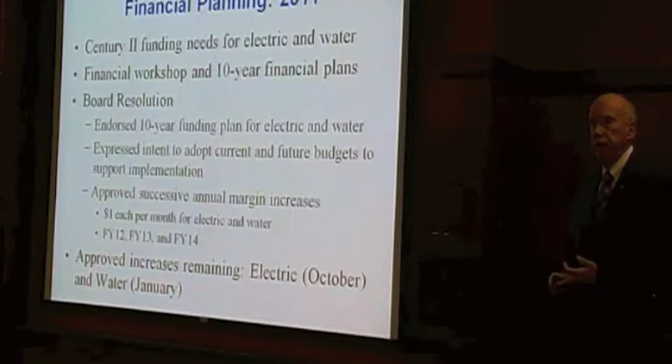And ultimately, the board approved a resolution that did 3 things. Number one, it endorsed the 10-year plan, a 10-year program for our Century 2. Not that it'll be finished in 10 years, but we had presented a 10-year plan, and you basically endorsed that plan. That resolution also committed to continue to fund budgets that included the necessary capital plans to address the Century 2 needs.

And lastly, the board did something that had not been done before. You approved a series of 3 consecutive yearly increases for both electric and water. Those increases were to occur in fiscal year 12, 13, and 14. It would be $1 a month for each residential customer in water, and for each residential customer in electric. All but the last of those rate increases have now occurred.

The last electric rate increase will occur next month in October. The last approved water increase will occur in January.

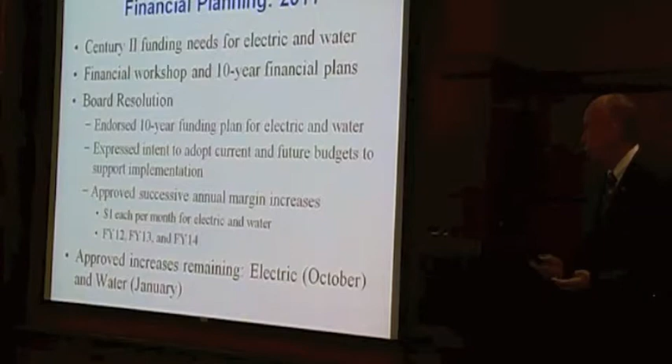So what that means is we're now at the point where we need to start talking with you in more detail about what comes next. The other thing we heard more recently from you all, probably at the end of last year's 5-year plan, is that you've been very complimentary and supportive of us in our 5-year plan presentations, but that's an awful lot of information crammed into a pretty short period of time. It's an extended meeting, but there's a lot of detail, complexity, and a lot of things we're asking you all to absorb and react to.

So as Ms. Roach indicated, what we're doing this year is coming back to you starting today. As soon as I'm finished here, Julie Childers, our Vice President of Engineering, and Mark Rawhuff, our Manager of Water Systems Engineering, will be presenting to you detailed information on our wastewater system. Next month, we'll come back and do the same thing on gas, and we'll also have a gas and wastewater financial workshop.

And then in the months to come, we'll do the same kind of thing, presenting to you our water system and our electric system. And ultimately in the spring, with the 5-year plan, we'll come back to you with more information and asking for multi-year rate increases for all 4 divisions. So that's where we're headed.

Wanted to give you all a little bit of information so you'll better understand what to expect over the next several months, and hopefully this will help give you the opportunity to absorb it a little bit better, think about it a little bit longer, and engage with us with questions, suggestions, and ideas, so that when we come into the spring with our 5-year plan, and ultimately with the resolution on funding, everybody will feel very comfortable about where we are and where we're headed with this program.

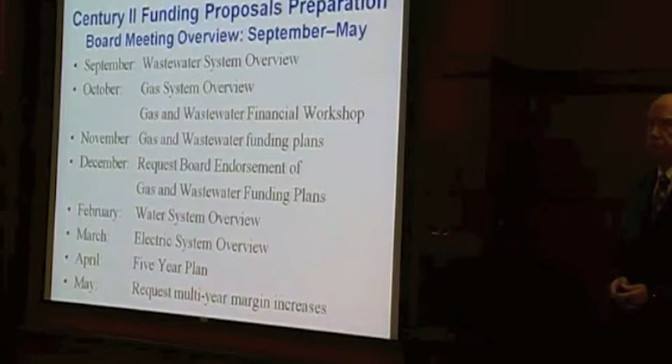This is the agenda of what I'd like to talk about today, beginning with the EPA consent decree back in 2005, and then continuing on with our response to the consent decree, which started with communication with our customers, and then our rate increases and budget expenditures at that time to fund the projects, and then the delivery of the required projects.

Next, Mark Rawhuff will be doing the look back 10 years, in 2003, to where we are today, and then a 10-year look forward, and then Mark Rawhuff will show some examples of TV inspection and sewer rehab that we do in our system. We'll follow that up with how we're going to be transitioning from our PACE 10 program into Century 2 for wastewater.

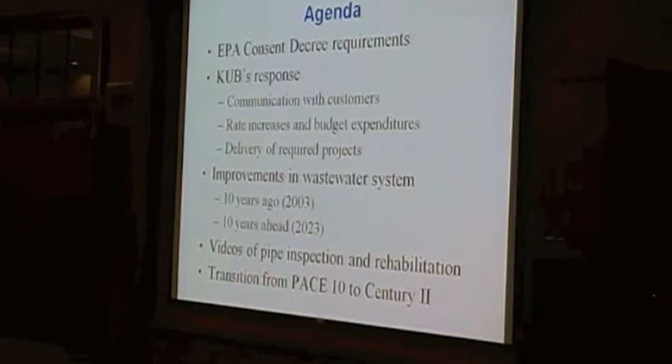Back 10 years ago, in 2003, it was a difficult time for the wastewater system. There were a lot of regulatory items that happened in 2003, beginning with a TDEC order at the beginning of the year. Then in the fall, the Tennessee Clean Water Network and the city of Knoxville felt that TDEC order was not stringent enough, and they filed a lawsuit. Later that year, EPA offered negotiations, and that occurred over the next year, culminating with the signing of the EPA consent decree in February of 2005.

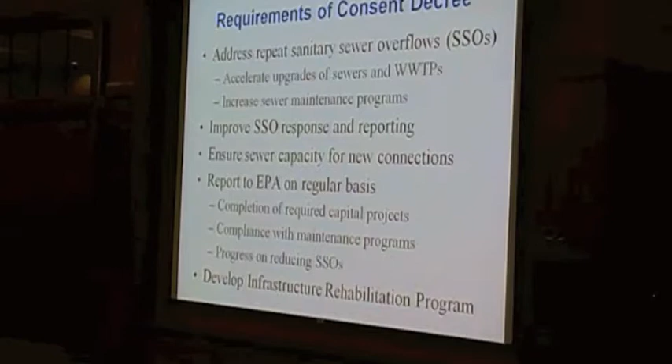So what were the requirements of the consent decree? There are many things required, but I'm listing the major ones here. First of all, we had to address the repeat sanitary sewer overflows, or SSOs - those that occurred twice or more during a 12-month period. In order to do that, we had to accelerate the upgrades of both our collection system sewers as well as our wastewater treatment plants.

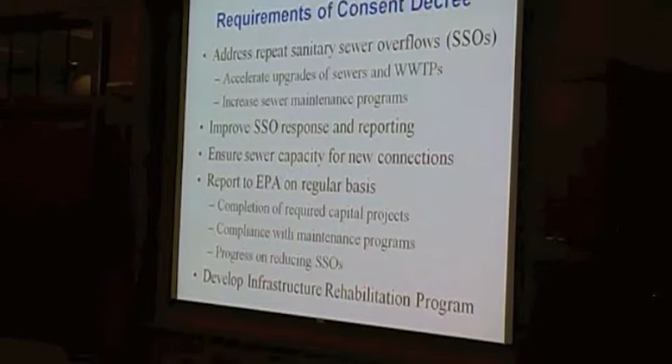We also had to increase the frequency and type of sewer maintenance that was done. Another CD requirement was to improve how we responded to SSOs, both in cleanup and in reporting those back to the regulators. A third component was the capacity assurance program - at this time there was a lot of growth in the system, and they wanted to make sure new developments that came on would not make the situation with SSOs any worse. A fourth component is our requirement to report to EPA regularly when we finish capital projects, how we're doing with our maintenance programs, and our progress on reducing SSOs.

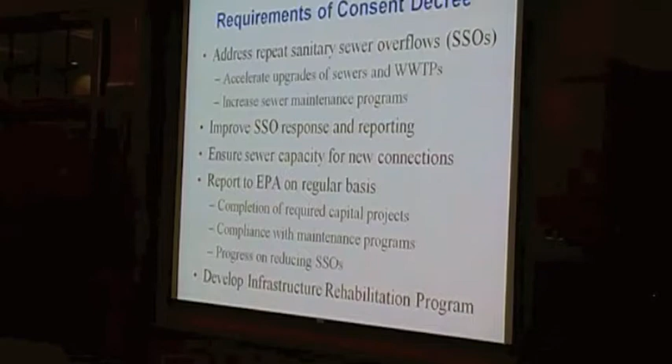A final component I'll list here is the development of an IRP, or Infrastructure Rehabilitation Program. I'll talk more about this later in the presentation, but for now, consider an IRP to be equivalent to our Century 2 program for wastewater.

When we had a delayed increase in our expenditures, that required a very steep increase all at once. And of course, that situation is not necessarily desirable either.

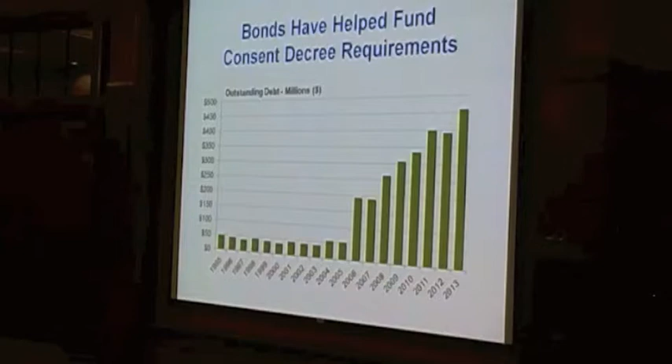We also funded these increased expenditures through bonds, and you can see that in 2006 is when we really started with increased debt in order to be able to fund our phased-in expenditures.

And we did complete those all before the deadline of June of this year. The second phase, which is due in June of 2016, there are 8 projects, and we've completed 6 and have 2 more under construction right now. Those 2 should be complete by spring of 2014.

In addition to the collection system projects, we also had major upgrades required in our treatment plants. This map shows the major drainage basins and where the sewer lines are located within them. If you look at the Kuwahee Basin and the treatment plant here, that's all shown in green. You can see it's our largest land area for a drainage basin, and it also has the highest density of sewer. On Fourth Creek, that's our second largest plant, and that's the one you all saw on your tour last month.

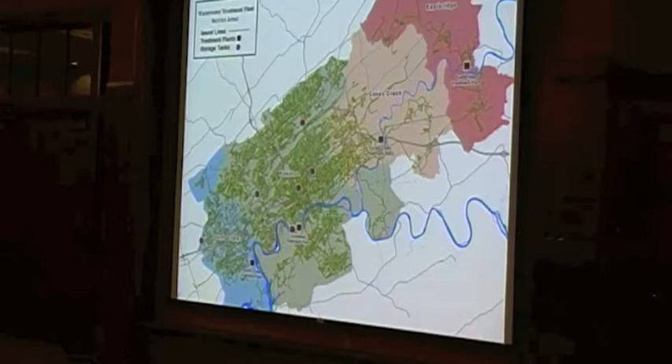I want to go in a little bit more detail about our wastewater treatment plant upgrades. We had 4 major projects that had to be done on these 2 plants. Phase 1 at Kuwahee was completed last December at a cost of over $50 million.

The Fourth Creek Phase 1 is the one that you all saw under construction. That's due in December of this year, and it looks like we're going to finish that maybe a couple of months early. Then there'll be a Phase 2 at Fourth Creek that's due in 2018, which is a much smaller upgrade, and then a larger upgrade at Kuwahee in Phase 2 that's due in June of 2021.

So with all the work that's been done on the collection system and all the work that's been done on the wastewater treatment plants, it's a good time to look and see what actually remains left to be done on the consent decree. As I mentioned, we have finishing up the last bit of the Fourth Creek wastewater treatment plant by December of this year.

Then we have another big deadline in December of 2016. By that time, we have to finish those 2 Phase 2 projects, and we also have some maintenance deadlines as well: sewer assessment completed, our private lateral assessment, manhole assessment, and stream water quality monitoring. And you can see that we're well underway on all of those.

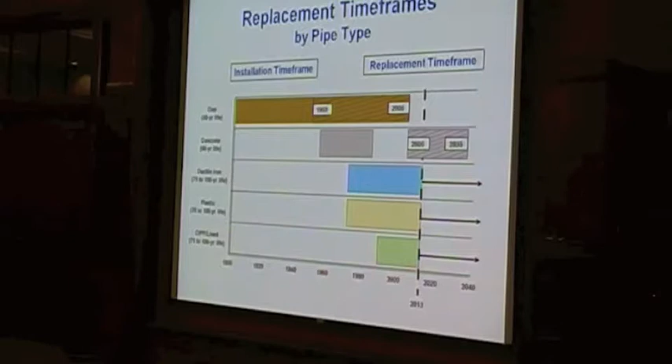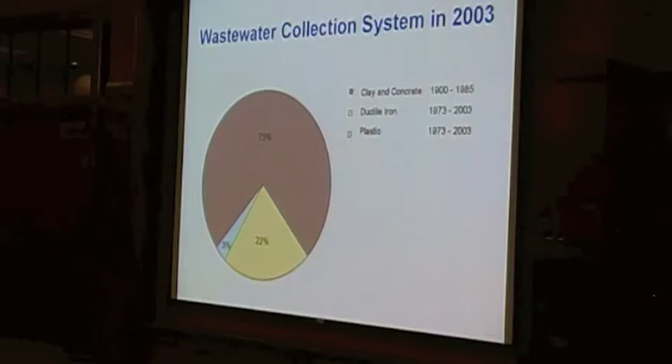So we're going to look at these next 3 slides. We're going to look at a snapshot in time of what our sewer system looked like 10 years ago, where we are today, and then where we'll be 10 years from now if we continue on the same pace that we're at right now. So 10 years ago, before the consent decree, our system consisted of 75% of the older type of pipe, the clay and the concrete. We had a small amount of ductile iron and plastic as well, 25% virtually of those two.

Where we are right now, 10 years later, after having 9 years worth of pace and work being done, the situation has changed to, instead of 75% old pipe, now we're down to about a half and half situation between old pipe and new pipe. So we've improved the situation quite a bit.

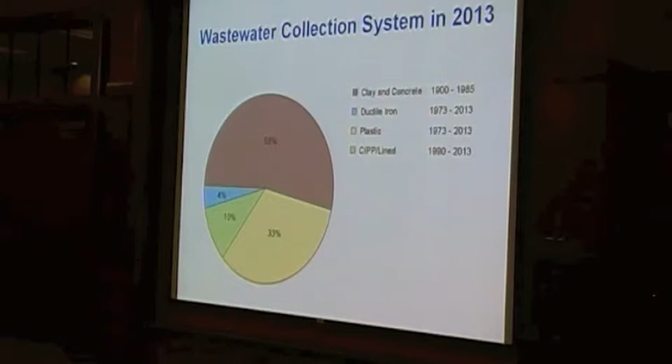Now the next thing we want to look at is if we continue on at the rate we've been doing, which is 2% of our system per year, or 25 miles per year. That's the rate we've been improving our system since the beginning of the program. If we continue on at that rate, then in 10 years from now, we will still have 1/3 of our system that has the old type of pipe in it, the clay and concrete.

What percentage of that 33 is clay? It'd probably be all gone in 10 years. That's what we're concentrating on, since that's the oldest pipe. At that point, it'd be almost virtually all concrete pipe.

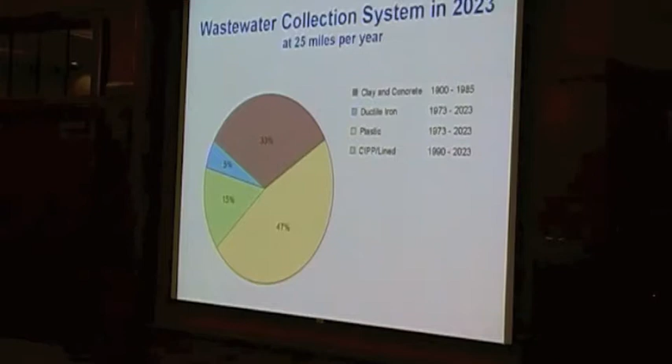So this slide shows a summary of what we just looked at in the previous pie chart. Beginning with 2003, where we had 75% old pipe. Now where we are now, about half and half. And then in 10 years from now, at the same rate we're going, we'd be down to 1/3 old and 2/3 new. So that's quite an improvement, but it kind of raises the question, when do we get rid of all the old pipe?

And so that's shown on the next slide here. It actually takes us all the way to the year 2040 at the rate we're going in order to get rid of all that old pipe.

Now when we get to 2040, does it mean we're finished then? Well, not really, because at that point we start the cycle all over again with that plastic pipe and still continuing to invest in the system.

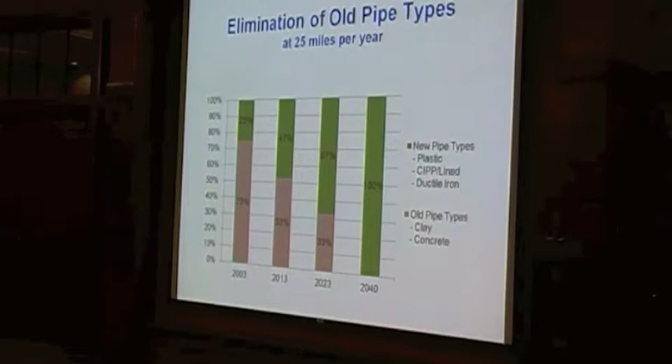So the important thing to realize here is that, first of all the old pipe will be done by 2040, and if you remember the previous slide where we showed the model replacement program being done by 2035 would be desirable. That's close enough for sewer years. That's a good match. So that's what we're recommending based upon this analysis.

I'm going to talk a little bit more about the IRP. The IRP is really EPA's assurance that a utility will continue to invest in the system in such a manner that the system doesn't deteriorate, and so that we improve on our SSO numbers.

So, based upon the previous analysis, the IRP for KUB would be to continue at the rate we're going at 2% of the system per year, which equates to 25 miles per year. This removes all of our old pipe types by the year 2040, and this is a similar analysis to what we did in Century 2 for wastewater.

So why do we need to do it? First of all, it meets the requirements of the consent decree to have a sustainable life cycle replacement program. It also continues to reduce the infiltration getting into our system by eliminating the old types of pipe and upgrading to pipes that are more watertight. And of course, that demonstrates KUB's continued commitment to reducing SSOs without outside enforcement from EPA.

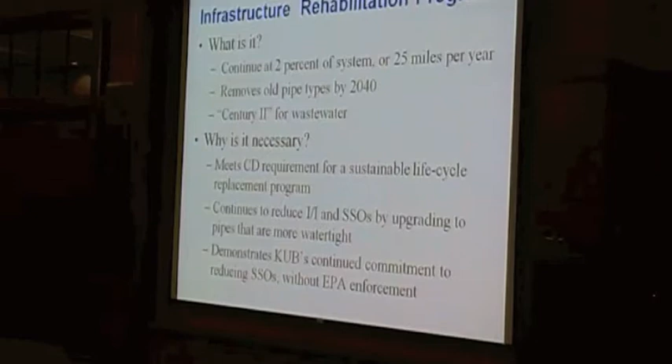Is there a certain area of the county that would have more of that clay pipe than others? A lot of the center city area has more clay pipe. Williams Creek was one that had a lot of clay pipe. We've done a lot of work in Williams Creek and got rid of a lot of clay pipe there already.

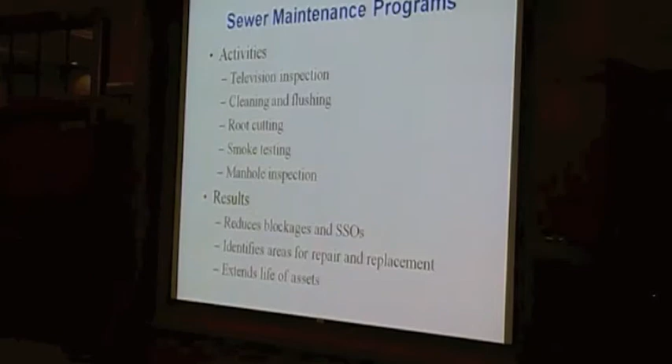In addition to the capital programs, we also don't want to forget the maintenance programs. As I showed a minute ago, maintenance is part of the EPA consent decree, so we want to make sure those activities are carried forward into the future. Those activities include TV inspection, cleaning and flushing, root cutting, smoke testing, manhole inspection, and others. The benefits of continuing with these programs are that it reduces blockages and SSOs, identifies areas for future repair and replacement, and extends the life of the assets going forward.

Next, Mark Rauhoff is going to show some examples of TV inspection and also sewer rehab techniques that we use in our system.

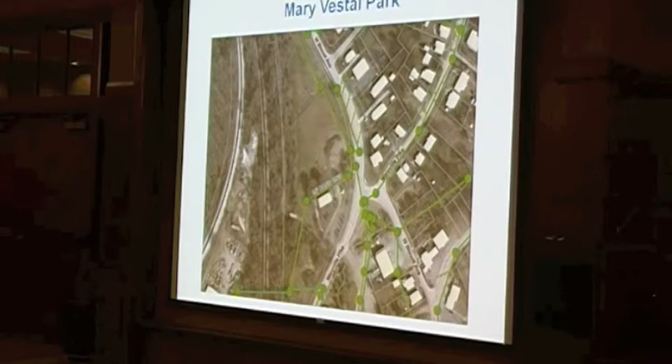This map shows an area in South Knoxville near Mary Vestal Park. We have a 24-inch concrete sewer trunk line inside the park. It was installed in 1960, so it's over 50 years old, which is beyond its expected life of 50 years. We're planning on replacing this section of pipe, 225 feet, in the next 3 months. So this project is ready to be constructed.

And you'll see in the video why this line needs to be replaced. The video will show you the inside of this 24-inch concrete pipe. You'll get to follow the camera down the pipe and see what we see when we look at these videos each day. It will show the camera going into the manhole and then into the pipe.

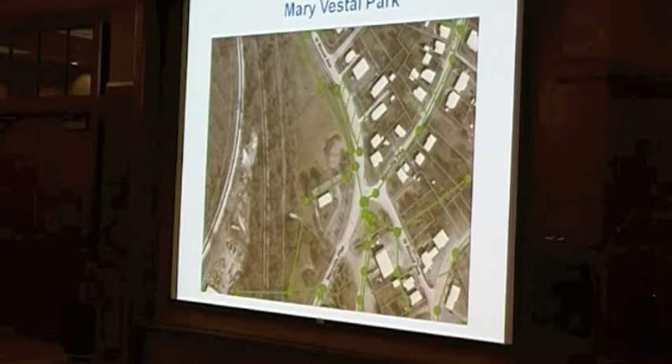Are the green circles manholes? They are manholes, yes. The manhole we'll be looking at in the video to begin with is not yet rehabbed, and this line is an old pipe. There was another project that happened downstream probably 15 years ago that actually replaced this manhole, so you'll see a nicer looking manhole at the end of the video. There was just a short section of ductile iron installed there, and you'll see the difference between what needs to be replaced on the upstream side and this little section downstream.

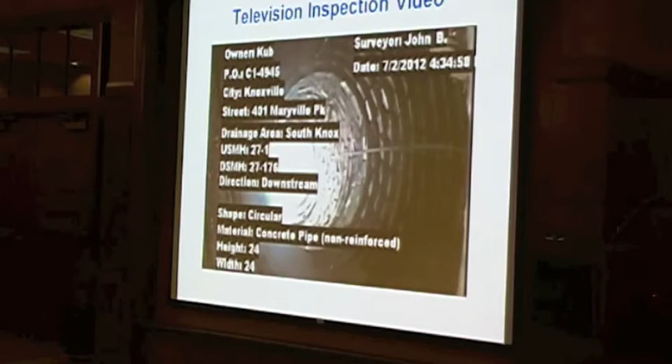There's the brick manhole that we enter on the upstream side. The camera goes in there, and a lot of information is collected. Here you're looking down the 24-inch pipe, following the flow along with the camera.

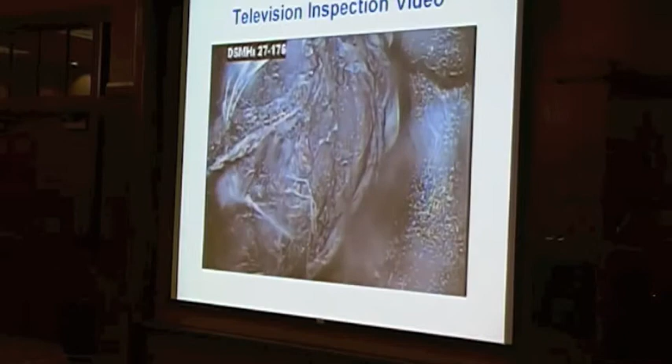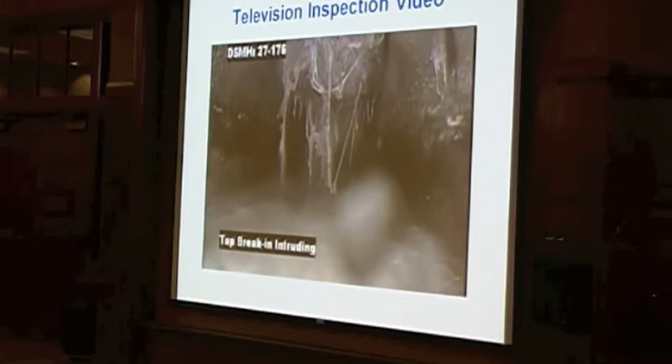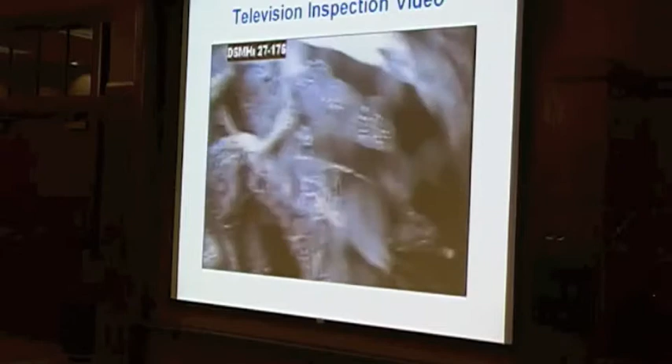You see some roots growing into the top of the pipe. This pipe is probably 8 to 9 feet deep, yet those roots are penetrating this concrete material. Again, this pipe is over 50 years old, and this is when these types of concrete pipes start getting roots growing in. You can see the cracks in the top of the pipe that let the roots come in, probably a joint right there where roots are growing through. This would be considered a medium root barrel.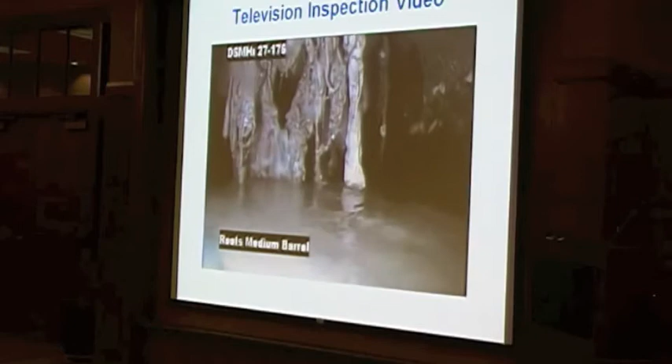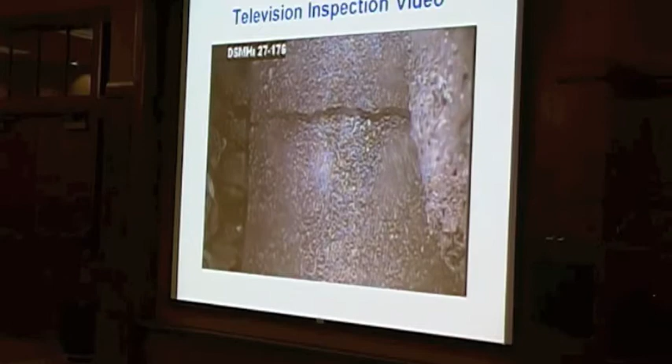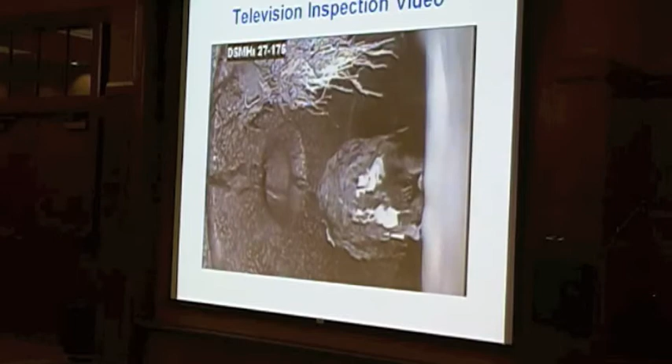Here you get more of a close-up of a crack along the top of the pipe. Again, this is a place where water can come in, and during wet weather events or rainy seasons, you have a lot more water coming in that we have to transport to the treatment plant and treat. As you can see, things get hung up on these roots, and that's what causes many of our blockages and overflows. That's the reason we're trying to get these roots out of our system.

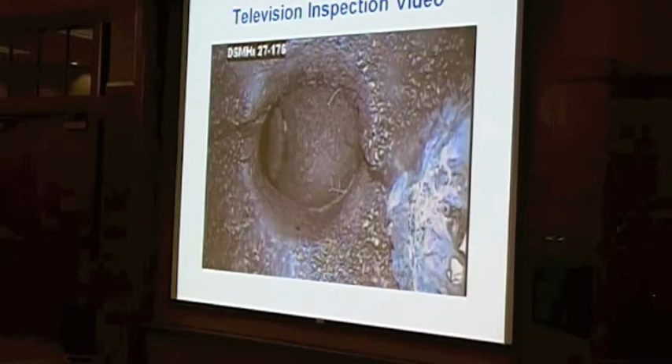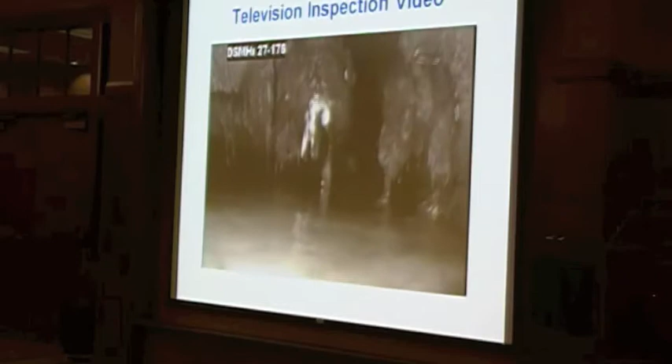This is a lateral tap, a connection that was actually installed purposefully for someone to have their sewer lateral tied to the sewer main. But that sometimes becomes a point where roots and water can get into the sewer mains if they're not constructed well. So the lateral is the responsibility of the resident to take care of. Correct.

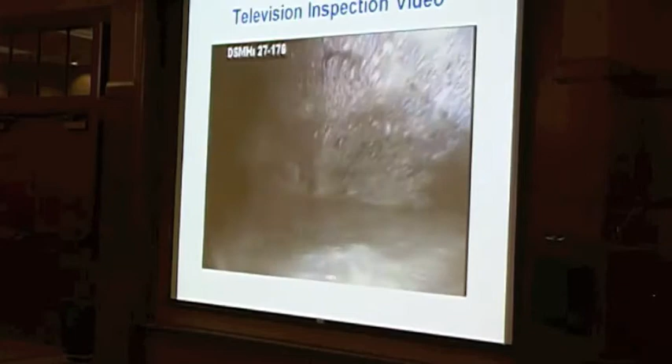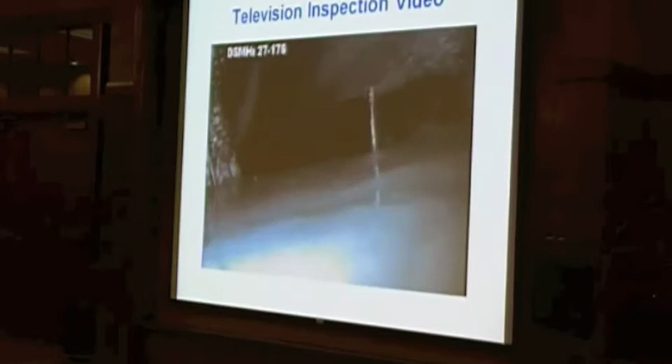You can imagine our pipes look like this at 50 years. If you've got a lateral out there that's been there for 50 years, you're going to have similar problems, and that's what our private lateral program helps us address.

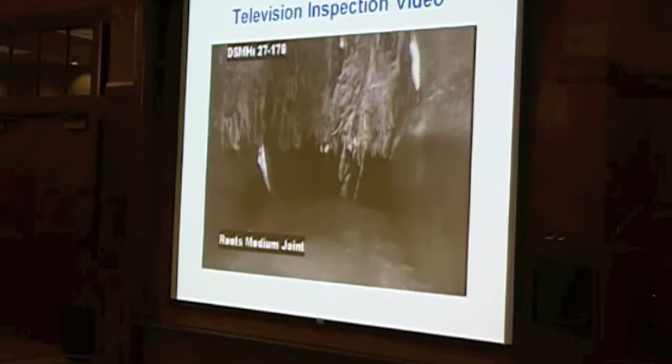Here you'll see a long longitudinal crack at the very top of the pipe. Over time, this could cause the pipe to collapse and fall into the flow stream, causing potential blockages. So not only are infiltration and inflow sources evident here, but also roots that can catch things and cause backups and overflows. The cracked pipe can also collapse over time and cause overflow. So before all these things happen, we want to go in and rehabilitate or replace these pipes.

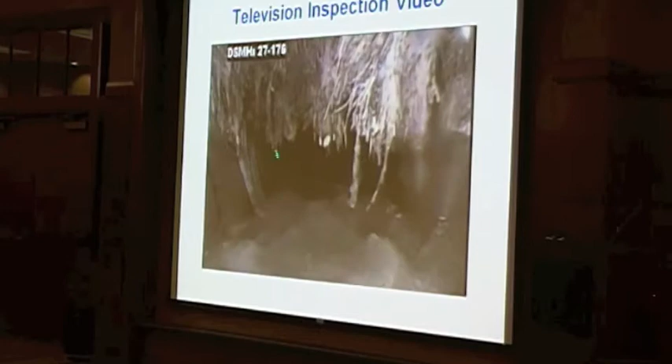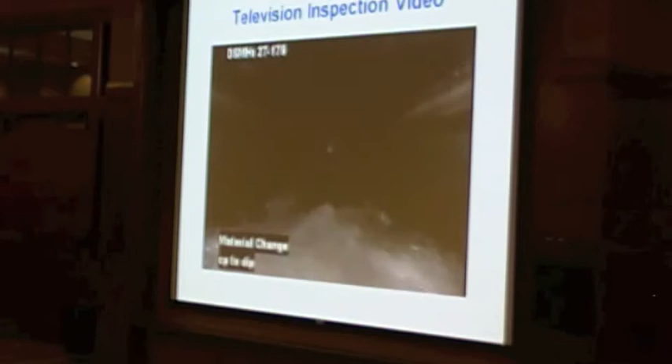This is a large root mass. This is where we're shifting. This is the new pipe I mentioned that had already been installed, so we're at the very end of this section. Here we begin to get into some ductile iron pipe. You won't see any roots, cracks, or inflow sources here, because this pipe was installed more watertight and has a longer life cycle. There's where the note was made that we've moved from concrete to ductile iron pipe.

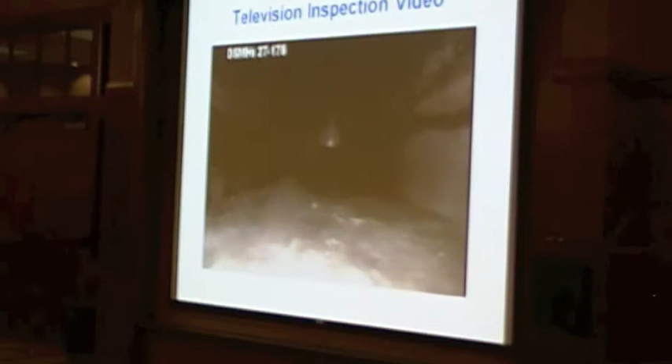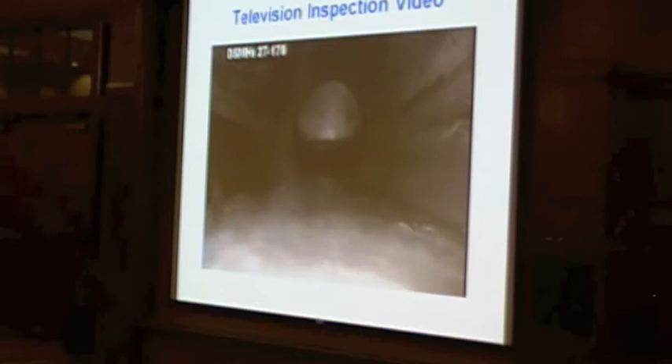As you continue down the path, in the distance you'll see light from a manhole. That's where we're headed, to that downstream manhole, which has been rehabilitated. You can see how much nicer it's going to look when we get there. It's got a PVC lining, which again prevents corrosion over time from wastewater gases and also helps prevent water from getting into the manholes. The brick manholes tend to leak a lot more than the new rehab manholes.

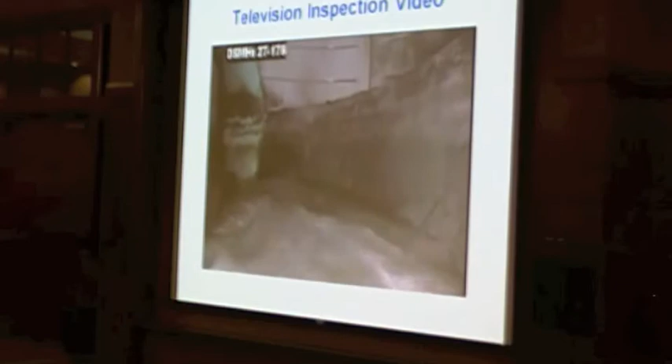This is ductile iron pipe that was installed downstream 15 years ago, and here's the inside again of a manhole, with the lid to get into it. This is an example of what we see when we televise the sewer mains. We rank those in the worst or highest part of our list. This is one tool we use along with others, and that helps form the IRP that Julie spoke about.

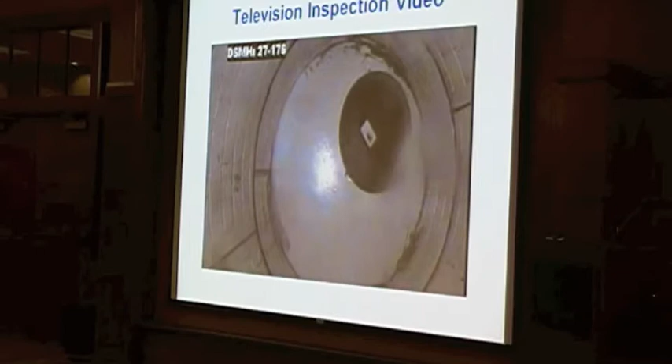We can upgrade our sewer mains either through the traditional open cut method. This is usually necessary if the pipe is severely damaged, has sags in the alignment, or the flow can't be handled because the pipe is too small. This is the most disruptive and most expensive method, but sometimes we can avoid having to do that.

Another method we can use to replace lines is a trenchless method. This is usually good for rehabilitating lines that are in relatively good structural condition but are leaking. A lot of the clay and concrete pipes that need rehabilitation are good candidates for these trenchless methods. The two types we primarily use are pipe bursting and cured-in-place pipe liner. A third method used less frequently is slip lining.

The two videos we're going to show you next will help you visualize the first two methods of trenchless technology: pipe bursting and cured-in-place. They'll let you see what's happening under the ground when these things are being rehabilitated. Just to tell you a little about what you're going to see, these two videos are schematic, so they're pretty quick. I want to explain ahead of time what's happening so you can follow along.

In pipe bursting, generally a cable is on a winch near a manhole, and that cable is pulled through the pipe to be replaced. Once it reaches the other end, there's a pipe bursting head attached to the cable, which you'll see in a moment. The pipe bursting head has been fastened to the new plastic replacement pipe. Then the pipe bursting head, along with the pipe in tow behind it, is forced back through the old pipe — that's how pipe bursting actually takes place. You'll see that in this next video.

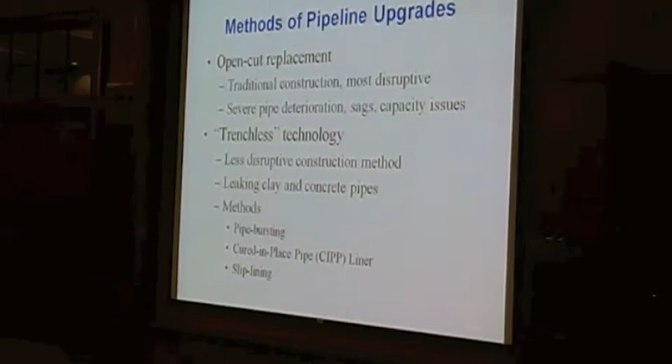This is a pipe bursting head, a mock-up of that.

This is the area where the new plastic pipe will be inserted, and that grip will tighten up around the pipe to allow it to be affixed to the pipe bursting head. So that's what it's demonstrating there.

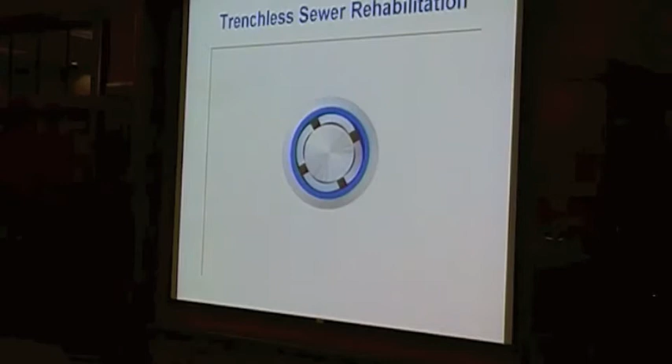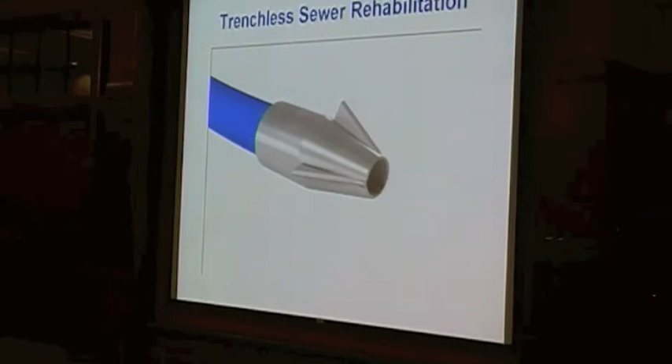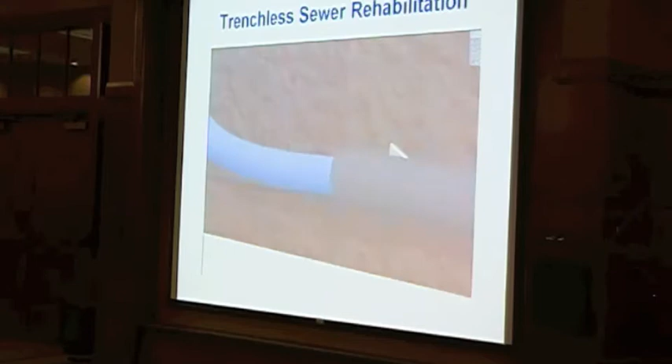The cutter blades are then installed on the pipe bursting head. There's different heads used for different types of pipe. The cable that's been pulled through the old pipe is attached to the bursting head, and then pulled back through a pit into the old pipe through a hydraulic machine that will pull that cutter head, which cuts the old pipe and pulls along the new pipe in its place.

So this is clay pipe. A different head is used for clay. There's different techniques that the workers use to make this successful.

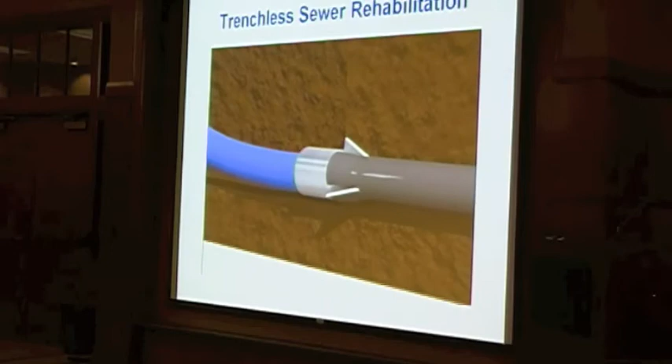This is what pipe bursting consists of. It requires a whole lot less digging. The winch pulls it on through, and then you have a brand new pipe installed where the old pipe once was. The laterals that are connected to the old pipe have to be reconnected, so there is still some digging that has to take place at the lateral location to reattach them to this new pipe. But the digging is a whole lot less with this method than open cut, so there are times where we'll use this method.

The second video we wanted to show you is the cured in place pipe liner. This method consists of either water or air pressure forcing a sock-like tube down through a manhole and through the pipe. It's almost like a sock—when you take your sock off at night, it is inside out—and this water is forcing this long tube through the pipe. Once it's completely through, water is inside of this tube.

Resins have been applied to this polyester tube, and that water is heated up, causing the resins to harden. Once hardened, they become a new pipe inside the old pipe, as structurally sound as a new pipe and watertight, and that's what we're going to see an example of here. It has a 100-year life, anywhere from 75 to 100 years. We haven't had this method long enough—CIPP started back in the 90s—so there's been testing done, but we don't have experience for that full length of time yet. We're projecting 75 to 100 years.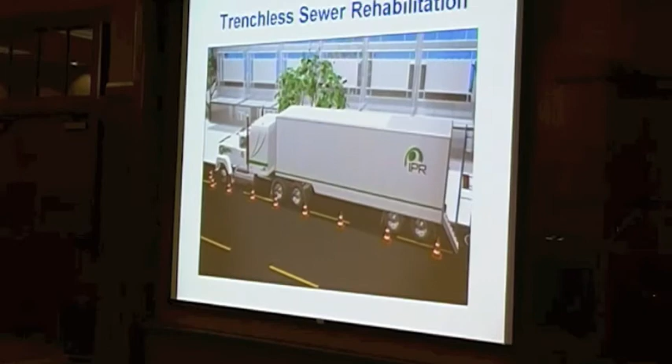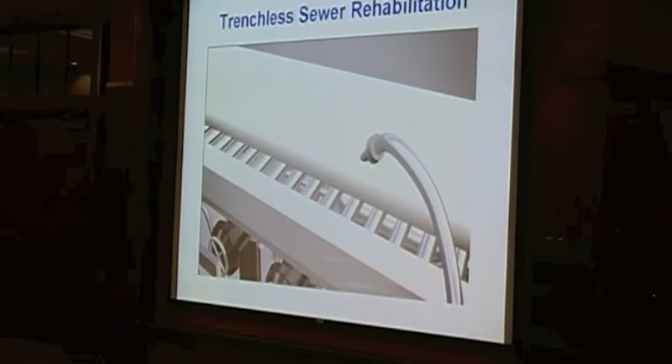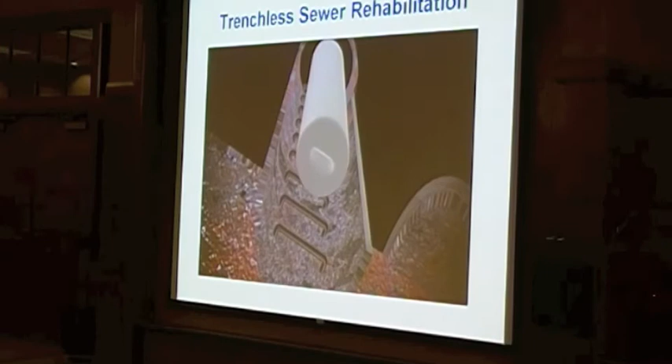So this is a picture of the old pipe, a cutout of what needs to be rehabbed. This truck houses the liner. Many times this is done at a manufacturing plant and not on site like this demonstrates, but ultimately it's delivered in a refrigerated truck that has this tubing saturated with resin. The water is pumped into this tube, forced down through a manhole, and the water pushes it like a sock would be pushed all the way to the other end.

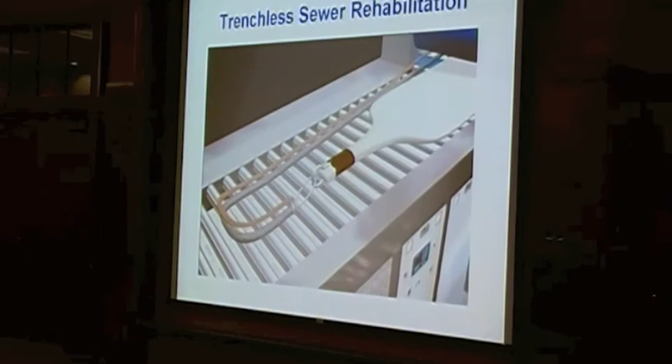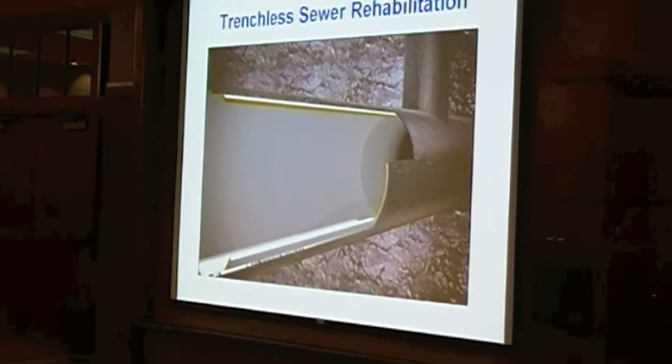This is showing the hoses that are used to heat up and put water in there to heat the pipe. This is left for several hours under a certain temperature. Once that occurs, the pipe becomes a solid pipe formed inside the old pipe.

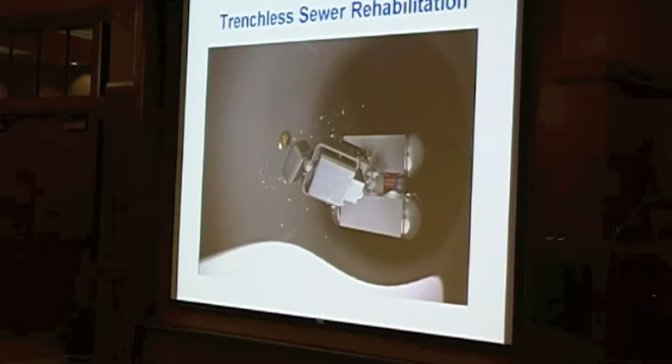A robotic cutter is then used in this situation to go inside the pipe and cut out the old lateral opening. Other times we actually dig on the outside and replace the lateral all the way, attaching it to the liner. So there are two methods there, but this shows you all the pipes that could exist beneath the ground, which hopefully avoid having anybody dig when you do this liner process.

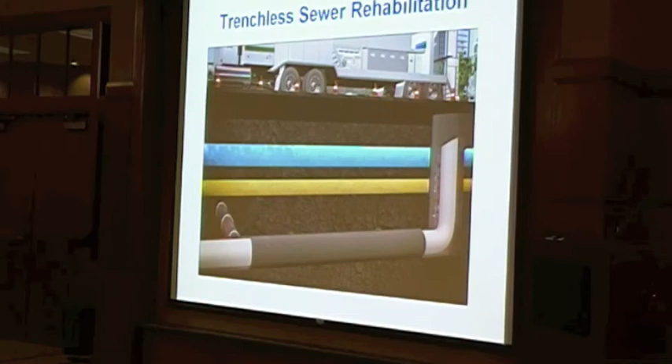But if you have a tree growing and roots come through there, what happens to the tree roots? We will usually go in and clean the pipe before the liner is placed, or even before pipe bursting occurs. So all those tree roots we saw in the earlier video would be cut out—we have cutters that go in there and remove all the roots to make sure it's a clean pipe before the lining process takes place.

What determines which of those methods will be the most favorable? I'm sure there's a number of factors, but if there are a couple of the biggest determinants, what are they? First of all would be cost—we want to go with the least expensive option to do the most work with the money we have, so we would look to trenchless technologies because they're usually less expensive than open cut.

If the pipe is still round and doesn't have a lot of defects, then that works really well. If it's just roots or infiltration causing the problem, you'd want to line it or pipe burst it. If you have a lot of collapses or the pipe is actually falling in, many times the CIPP...